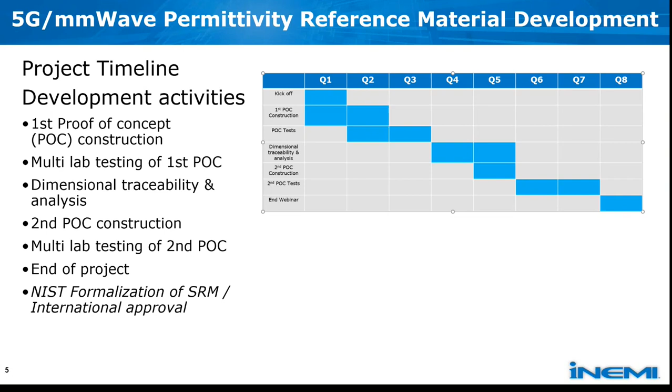Okay. And then the status today is that we have actually performed a fair bit of initial testing for the pre-proof of concept that was done as part of this previous iNEMI project that I'm referring to, the 5G materials characterization project. This was critical to get some early information about how to go ahead and plan for the proof of concept tests.

We also have the confirmation to have the critical resources from NIST who can support this project, because this would be driven by National Institute of Standards and Technology, with Nate being the champion from that team.

We also are going to use fused silica as our primary candidate, and we have been working with the source as well as a methodology of preparing this material with very, very low TTV. We have the partnership with Mosaic Microsystems, who I believe is also on the call, to be able to supply the material and be able to process the material for the rest of the project study.

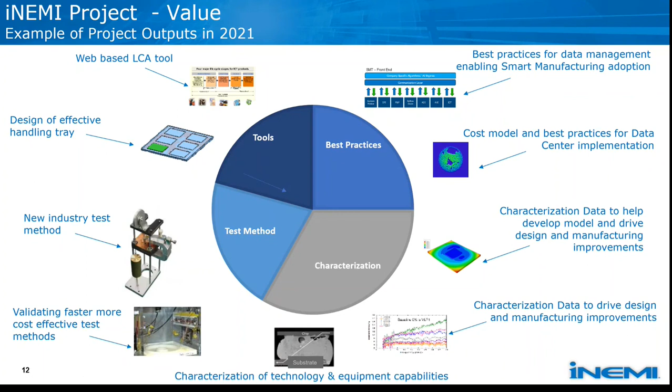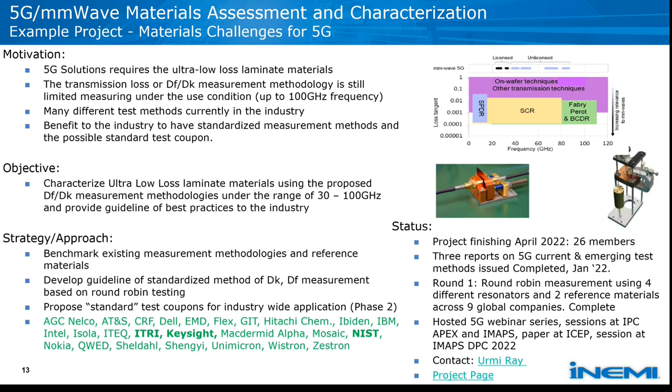We have a lot of projects looking into smart manufacturing, characterization of solder joints, certainly tools for inspection and metrology for packaging, photonics areas, sockets, etc. And then a couple of examples, and you'll get this package of information since you've joined the webinar. So I won't go through this, but this is the 5G mmWave materials assessment project that I talked about.

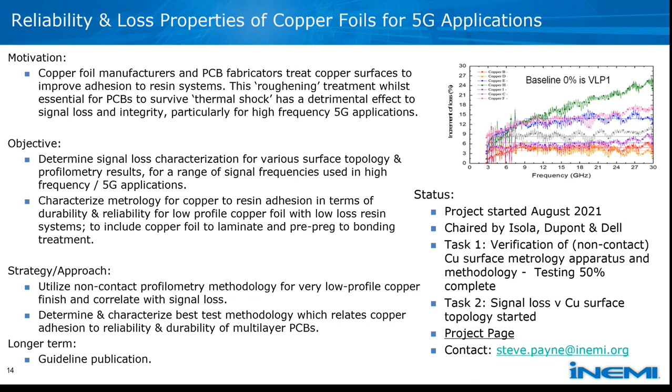There's a similar project, kind of a sister project, looking at the impact of roughness of copper foils for 5G applications that my colleague Steve Payne is leading. Some of you are participating in that project. And then one other example, in a slightly different area, which is on substrates and looking at RDL adhesion strength measurements. I just picked a couple of examples.

In any given year, there are generally of the order of 15 to 20 active projects. Typically, we try to manage these projects in a pretty short time window, 18 to 24 months, so that we have an active group working with a pretty aggressive timeline. And we believe that's the model that is successful and is appreciated by all of the industry members that we have.

By the way, iNEMI also has a lot of, I keep talking about industry, but we obviously work very closely with the national labs and across the globe, and a lot of partnerships with the universities. Okay, so that's the introduction part of the talk. I'm going to hand it over now to the tag teaming team of Nate and Mike. My understanding is that we will go through now the technical details, and I'll hand it off to Nate.

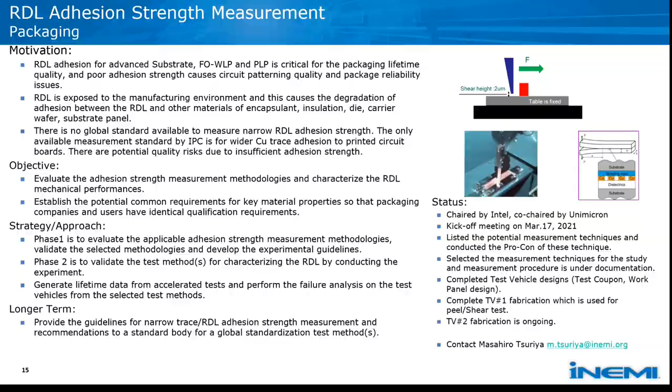Great, thank you guys. Pardon me. Thank you guys so much for coming today, and thank you, Urmi, for the introduction. You guys are all here because you're part of the semiconductor manufacturing complex around the world. You're already familiar with the fact that the semiconductor industry represents a huge part of the global economy. And I think we've listened to you and heard you about what your needs are. Go ahead, next slide.

So in a recent 5G iNEMI report, it pointed out that the lack of traceable reference materials for millimeter waves is a very serious problem. And this lack makes verification of measurement methods and laboratory techniques impossible in an industry setting. Adding to that, an SRC report also identified the needs for new dielectric characterization techniques above 100 gigahertz and up to 500 gigahertz, and the need to characterize inhomogeneous and anisotropic materials for industrial applications. So we know that dielectric properties impact all of microelectronics and manufacturing, and we've heard you about what you need from NIST. So go ahead, next slide.

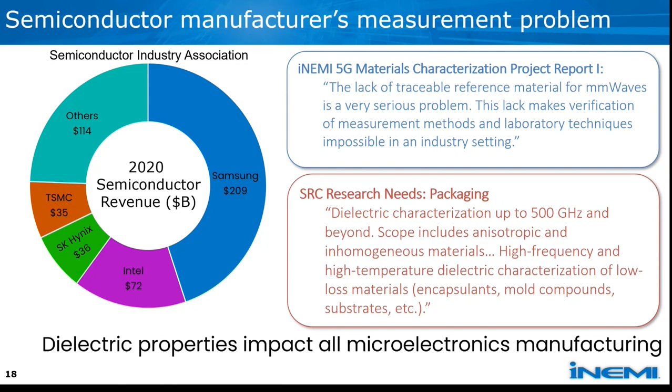So a lot of this was borne out by the fact that some of you went to the NIST Standard Reference Materials website, typed in the word dielectric to order a new standard reference material, and you found that, go ahead, next slide, there is no standard reference material for dielectric constant, regardless of the frequency, whether it's DC or AC or millimeter waves. There's just no standard for dielectric constant and loss tangent, and that impacts your bottom line because it impacts internal metrology characterization and acceptance testing. Go ahead, next slide.

So how do you guys use standards in your everyday labs and materials and device development? Well, one of the ways that you use them is a metrology capability analysis. In this case, you might have 3 technicians, Paul, George, and Joe. They all measure the same thing, and 2 of them get a different answer. In this case, you actually don't know who is right. You might think that obviously Paul and George, because they got the same answer, are doing things correctly and getting the right answer, and Joe is getting the wrong answer. But it could also be that Paul and George are wrong and Joe is right, and there's something fundamental in their metrology or in their calibration, and you wouldn't be able to identify that problem without a standard reference material.

So the second application for standard reference materials is acceptance testing. Go ahead, next slide. So in acceptance testing, you're a vendor or you're a manufacturer, and if you're a vendor, you want to provide the most accurate specification for your material. You want your specification to be NIST traceable so that you know that it's right. And then when you send it to your manufacturer, you want them to implement that permittivity value or loss tangent value that you provided into their models so that when they do internal testing, they also get the same answer, right? So it creates trust between manufacturers and vendors.

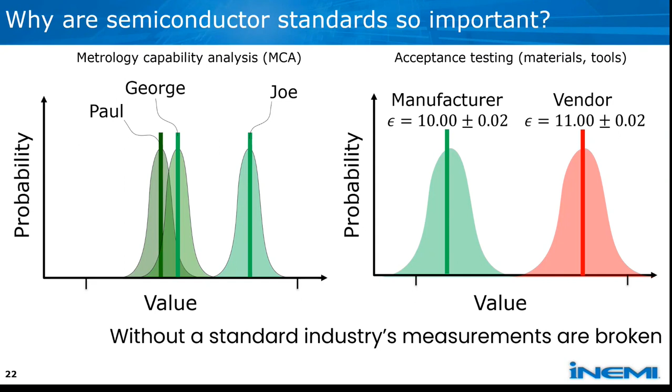If you're a manufacturer and you're receiving a material, you want to know that the materials the vendor is providing and the specifications that they're providing are correct. In this case, we have a manufacturer and a vendor, and the vendor is providing a specification of permittivity 11, but the manufacturer measures a permittivity of 10. Now, this difference is only 10%, and you might not think that that's a really big deal, but as Urmi pointed out, industry really needs uncertainties on the order of 0.2%. And obviously, this is an unacceptably large deviation between the vendor and the manufacturer. So without a standard reference material, industry can't perform these fundamental tasks in order to make new technologies.

Go ahead, next slide. So what can happen without a standard? So when Mike was first telling me about his problems and what he does at Intel, he gave a really good example about the capacitors in the back of a CPU. In this case, what Mike said was that if the permittivity is wrong by about 10%, just like our earlier example, then that might require them to include 4 additional capacitors on the back of their CPU.

Those additional capacitors would cost a total of 34 cents per CPU, but over 100 million units, that would cost Intel about $34 million a year. Now, that's an unacceptably high cost that Intel could avoid, in this hypothetical example, if they had a standard reference material to calibrate their measurements.

Now, this is just a hypothetical, but it illustrates the point that when you have high volume manufacturing, getting the permittivity right is really important. And that's also true for the loss tangent. Go ahead, next slide.

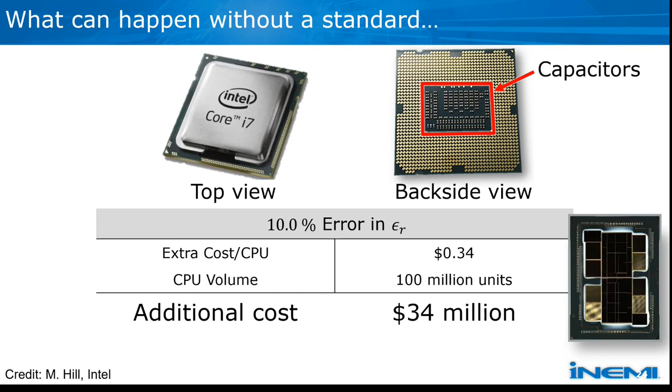You have input-output signals that have signal information in the high gigahertz and the hundreds of gigahertz. You have DC signals and capacitors, and all of those materials need to be characterized in order to get the performance that people want from their devices. Go ahead, next slide.

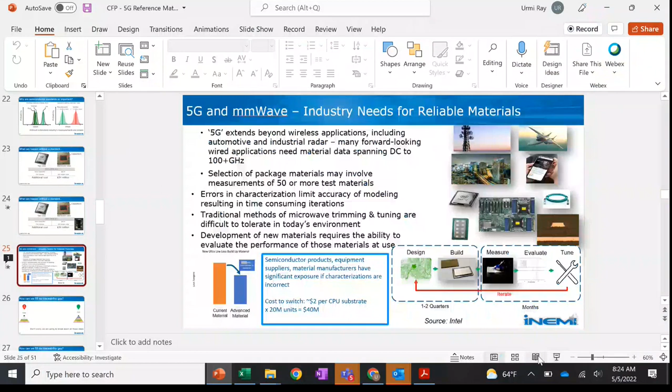So industry needs reliable material properties, and 5G really extends beyond, oops. Yeah, sorry. That's okay.

5G really extends beyond just wireless applications. It really impacts automotive radar and industrial applications that go well beyond what we think of as just telecommunications applications. For instance, you might be surprised to know that automotive radar is one of the leading sectors for companies like Keysight and vector network analyzer manufacturers because they need to characterize the materials that go in automotive radar. So that's really important. Go ahead and chime in.

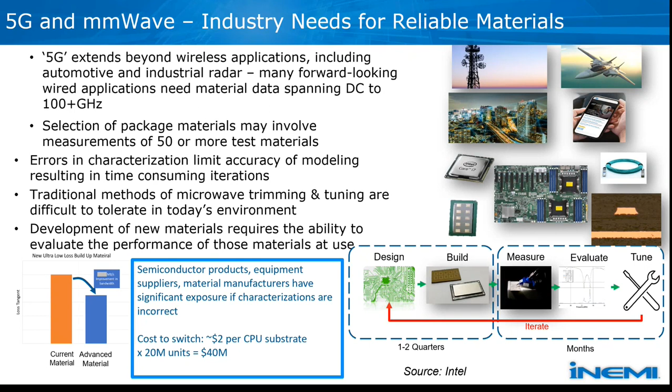That sounds great, Ermi, if you'd like to take this slide. Okay, we'll go ahead and do the next slide.

All right, so how can we fill this? So we've already made the argument for why traceable materials are important, how they impact your bottom line. So you know that you need them, but you don't know what they are. And we also have this fundamental problem of we need to get from the fact that we don't have a standard reference material to a new place where we do have a standard reference material. So how are we going to go from the left to the right? And that's what this iNEMI initiative is going to do. So we have some ideas about what those steps are.

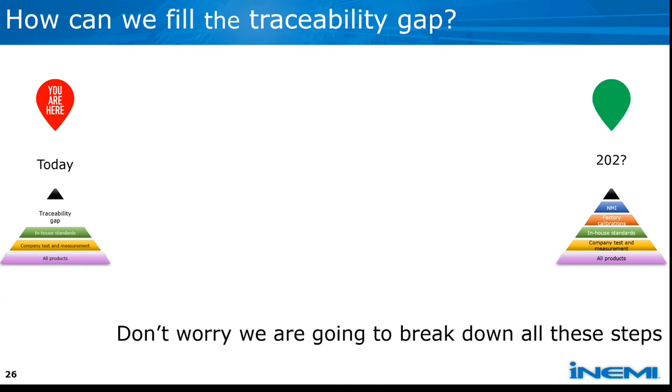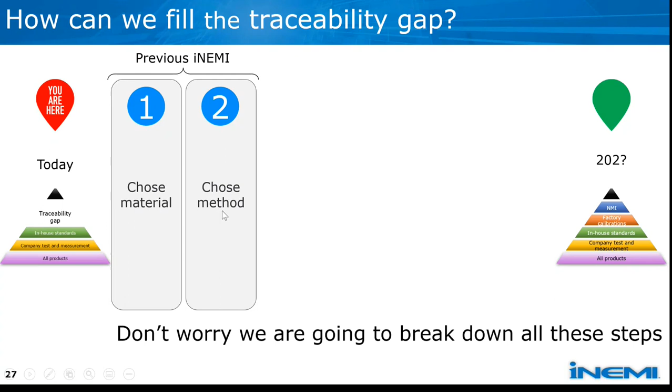So it starts, go ahead, next slide, by defining what the materials and the methods are that we're going to be using to develop a standard reference material. In this case, a previous iNEMI report talked about fused silica, and we're going to discuss that in a minute. It also identified split cylinder resonators as a possible traceability path. We're going to talk about that as well. And go ahead, next slide.

The next step is to develop the fundamental theory that's associated with the standard method that we're going to be using. Then we're going to measure the scattering parameters of our devices with and without the sample. That's going to allow us to extract the material properties once we've extracted the dimensions.

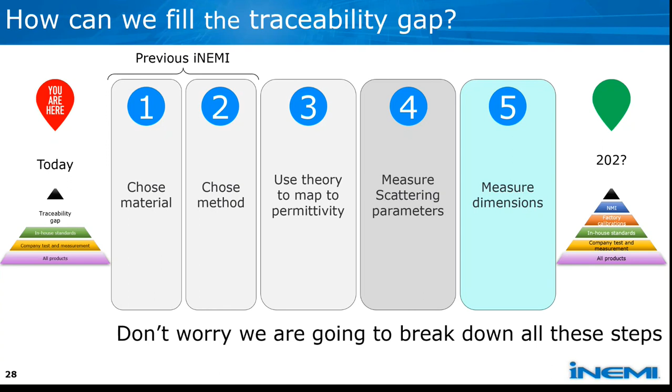So we're going to talk about each of these steps one by one and explain how you, as an iNEMI participant, can play an essential role in defining what the next generation of standard reference material is and what it looks like. Because NIST doesn't want to just make solutions that fill a traceability gap. We want to make solutions that solve problems that matter to you and impact how you would use them. Go ahead, next slide. So let's talk a little bit more about step one.

So here, the iNEMI special report identified fused silica as a candidate for a next generation standard reference material. That's for a few reasons. One, we're able to manufacture it into this geometry, which is this rectangular coupon with the rounded edges. It's easy to manufacture in that geometry. We can also get it to have these very precise thicknesses. In this case, we've got a target thickness of about 150 microns. And we can hit total thickness uncertainties of about 0.5 microns, actually a bit better than that, about 100 nanometers, thanks to Mosaic's new processes.

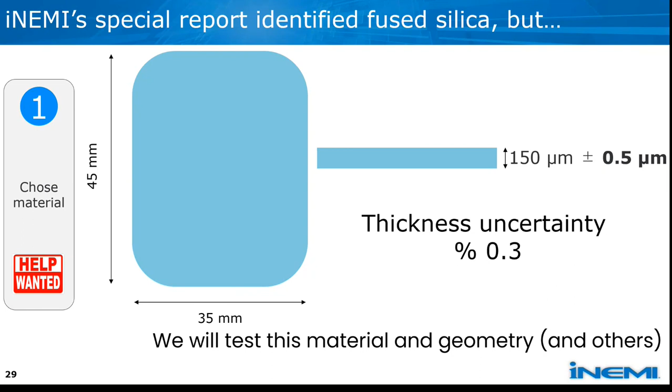That total thickness uncertainty might sound sort of unbelievable. You might think, wow, that seems like a really, really low total thickness variation. Isn't that overkill? And the answer is no. We actually need that level of uncertainty on the total thickness variation in order to hit that specification that Ermi talked about, which was that 0.2% uncertainty on dielectric constant and loss tangent. So in order to deliver that type of uncertainty to you, we need to do much, much better, and that's what's required. Would you like to pipe in, Ermi?

Okay. Okay, so the next step is to choose a method.

What's nice about this technique is that it potentially has a very short traceability path, where the only thing that we need to measure is the diameter of the cavity, the depth of the cavity, and the dimensions of the sample. Go ahead, next slide.

We're going to explore other candidate paths as well as a part of this iNEMI initiative. We want to include whatever path you're doing in your lab as part of the characterization and development of this next generation standard reference material. We want to develop a solution of that little blue coupon. We want to make sure that it works for you. Go ahead, next slide.

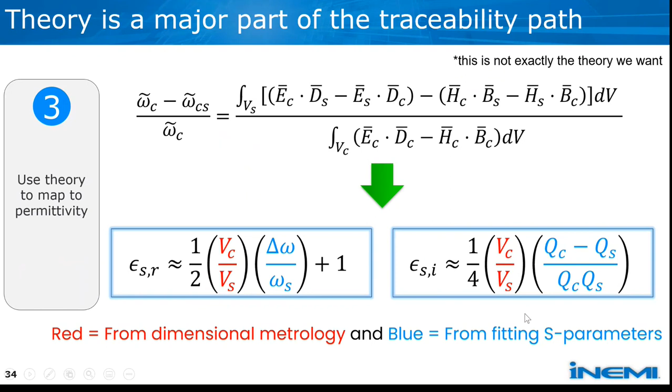And by measuring the transmission, or S parameters, through the cavity, we can find what the resonance frequency is and the quality factor. And we're going to talk about, as when you're a member of the iNEMI initiative, your input will help us test the usability of the candidate SRMs in your manufacturing test measurement setups. Go ahead, next slide.

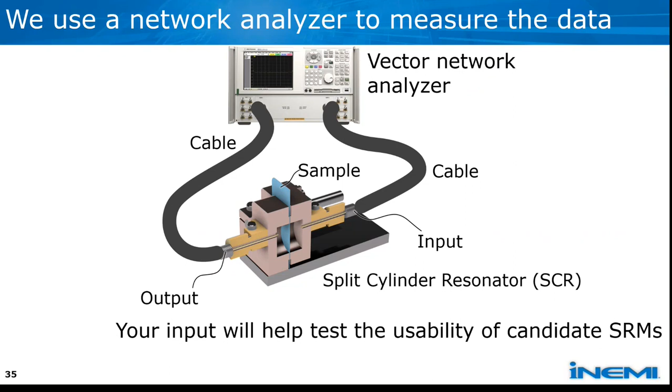And all we're going to do is we're going to measure that resonance frequency, that fc and Qc. And sometimes we'll write omega c. That's just 2 pi times fc. That's the angular frequency right there. So we're just going to measure the cavity with and without the sample. Go ahead, next slide. So let's take a zoom out here.

We're going to zoom out and we're going to look at the cavity. You can see that it's a very, very sharp peak without the sample. Go ahead, next slide. Once you introduce the sample, the peak moves to the left and down. That's because you're kind of like loading the capacitance in the cavity, and it's kind of like an LC circuit. So as you increase the capacitance, that's inversely proportional to the resonance frequency, and so it shifts down. So we measure how much it shifts down.

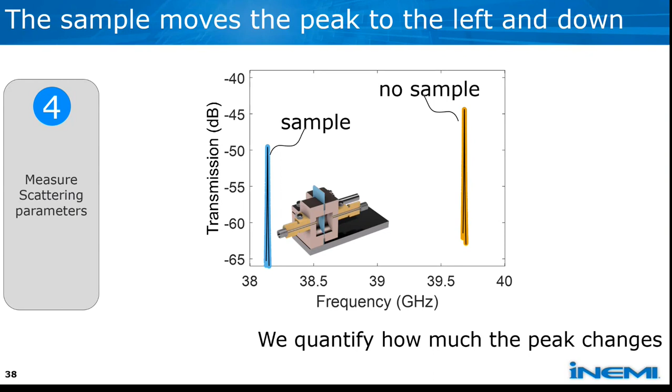Go ahead, next slide. So we measure how much it goes down and how much the quality factor changes. So here you can see that our resonance frequency is shifting by about 1.5 gigahertz, and the quality factor is changing by about 2,500. So these are essential inputs that go into the theory and allow us to extract the material properties. Go ahead, next slide.

So the next thing that we need to do is we need to measure the thickness of the sample. That's one of the most critical properties of the little blue coupon, right? And we think that this white light interferometry technique that's being sold by FormFactor is the best way to measure the thickness of that coupon for our technical applications. And in this case, we really need uncertainties on the order of like 100 nanometers, and you'll see why.

So there are a lot of requirements to this technique. We're still learning about it. And what this technique would allow us to do, as your participation in the iNEMI activity, is you would be able to compare our measurements of the thickness of the sample, which is calibrated with NIST standard reference gauge blocks, to whatever measurement technique that you're using. So you can also view this standard reference material as also a thickness standard for measuring glass, which is kind of interesting. Go ahead, next slide.

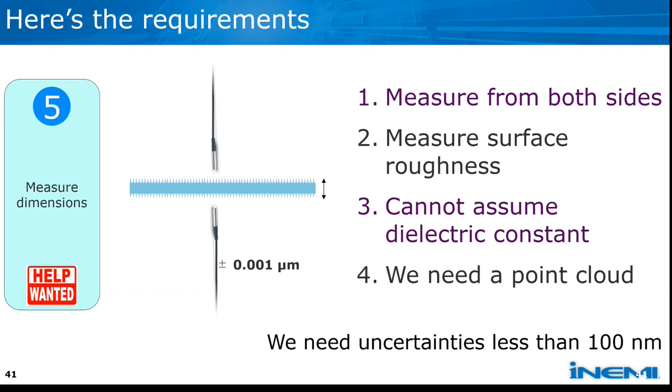So the final part to getting traceability is the dimensional traceability of the cavities. So this is a really big piece, and I'm really happy and proud of my management for really coming to bat and getting NIST Gaithersburg to help us get these measurements. As you might imagine, dimensional traceability is one of the most highly sought after and demanding things that NIST does, right?

The people that provide dimensional traceability are working all the time to provide dimensional traceability for everything that you can possibly imagine. And so NIST Gaithersburg has agreed to dimension our split cylinder cavities as a top priority for the next fiscal year. And we're going to talk about what those dimensions mean.

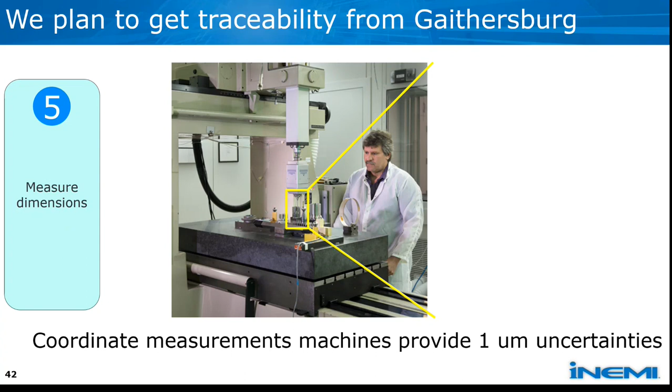Go ahead, next slide. So the way that they do these dimensions is with a very special coordinate measurement machine. And this might look very different than any coordinate measurement machine that you might have seen before. This is a very special one that NIST had made for this exact purpose. And it's capable of providing uncertainties down to 1 micrometer at multiple points along this cavity.

So we're going to get the dimensions of this cavity, we're going to get the diameter and the depth of the cavity, and those measurements and their associated uncertainties factor large in the total uncertainty on the permittivity and the loss tangent that we will provide to you.

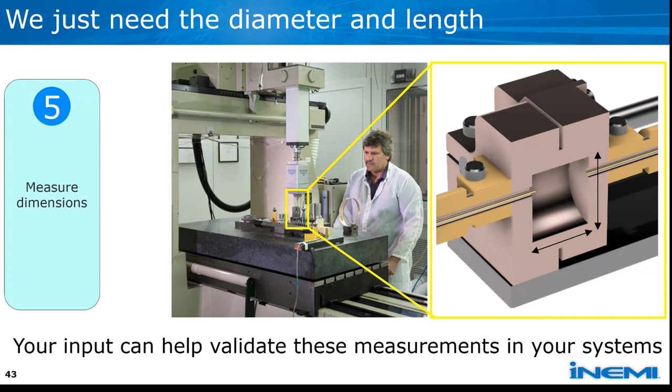Go ahead, next slide. Okay, so now we've talked about this pathway, and I told you all the steps in the pathway, and we also have prototypes that we've begun to do testing at NIST and characterization techniques, and so we're well on our way to providing traceability, maybe within the next couple of years, right? Maybe within the next year even.

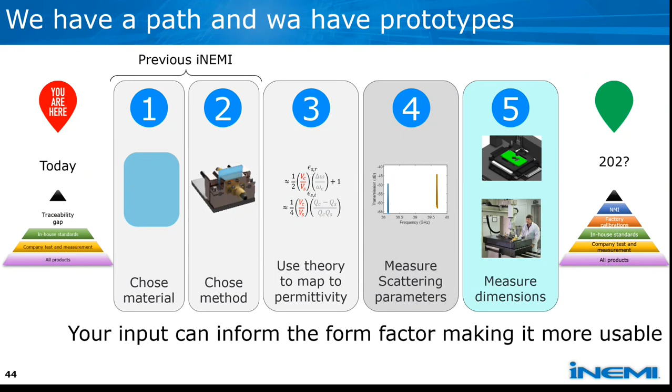And at the end of the day, you really want to know how those different inputs factor into the total uncertainty that NIST can provide to you. Let's go ahead and go next slide. So at the end of the day, we really want to know that NIST's solution is a solution that impacts you and your needs as industry.

And there are a couple different things that you need to keep in mind, right? You need a total uncertainty of about 0.2%. Well, there's something called the gauge maker's rule, and the gauge maker's rule means that the gauge that you use to make your measurement needs to be many factors smaller than your total uncertainty on your gauge.

Does that make sense? So if you're providing a specification that is a 0.2% uncertainty, NIST needs to provide you a standard that has many times smaller total uncertainties, typically about a factor of 10. So NIST's goal uncertainties should be about 0.02% on the total uncertainty on the permittivity that we provide to you.

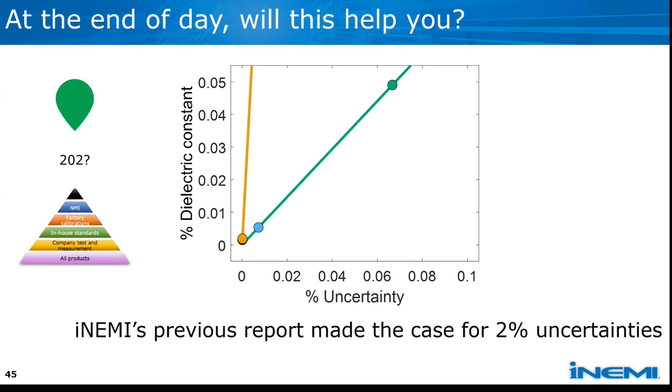Now, depending on the applications, you might be able to tolerate a gauge maker's rule of about a factor of 4, and that's what this plot is here. Let's go ahead and do the next slide. So the key things to understand this slide are that the y-axis is the total percent uncertainty in the dielectric constant on the SRM that we're providing to you, right?

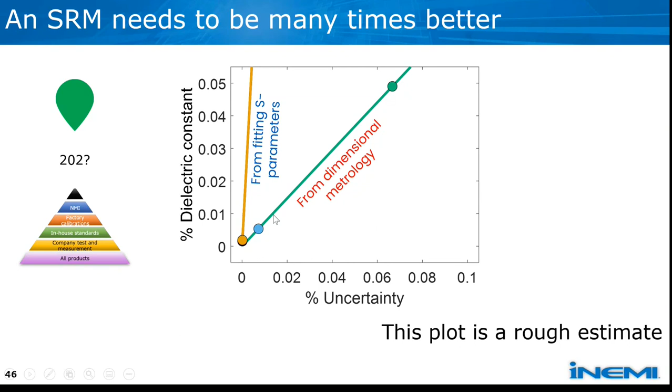And the orange line here is the uncertainties from fitting the S parameters. That's how accurately we know the Q or how accurately we know the resonance frequency. The green line is the uncertainties due to the dimensional metrology. And so the bright green line, go ahead, next slide.

The green dot is the total thickness uncertainty in the wafer that we would be getting from Mosaic for the fused silica SRM, and the blue dot is the uncertainties assuming a 1 micron dimensional uncertainty on the cavity. So you can see how these different numbers factor into the total uncertainty that NIST can provide to you. I'm not really worried about the S parameter fitting right now.

The contribution of the uncertainties on the S parameters are so small that they almost don't matter at this point. Like, NIST has crushed that. S parameters, no problem for NIST. But dimensional metrology, that still looms large.

So what I don't want you to think is that this is exactly the plot at the end of the day. I've made a lot of approximations to make this plot for you, but it provides some idea about how the total thickness uncertainty in the sample and the uncertainty in the cavities play into the uncertainty of the dielectric constant that NIST will provide.

And at the end of the day, your input will tell us how low NIST needs to go on the y-axis. And at what frequency, right? Okay, let's go ahead, next slide.

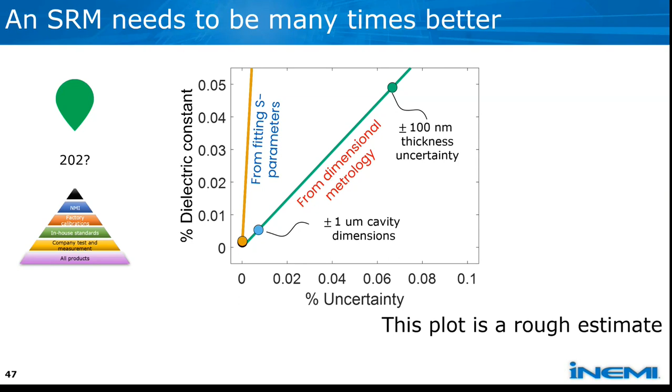So what I've told you so far is absolutely true. NIST is going to develop a materials characterization coupon that you can stick hopefully in your cavities or whatever technique you're using to measure the permittivity.

NIST is also developing on-wafer calibration kits that may go along with those coupons, so that when you apply your calibrations to your integrated circuits or whatever your applications are, your antennas, you can also do NIST traceable on-wafer calibrations, which would be a first ever thing that NIST would provide.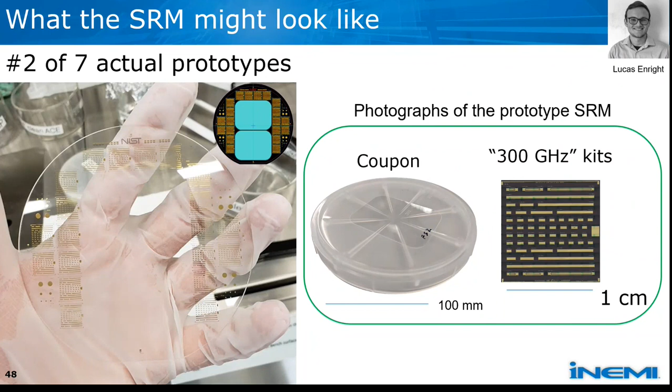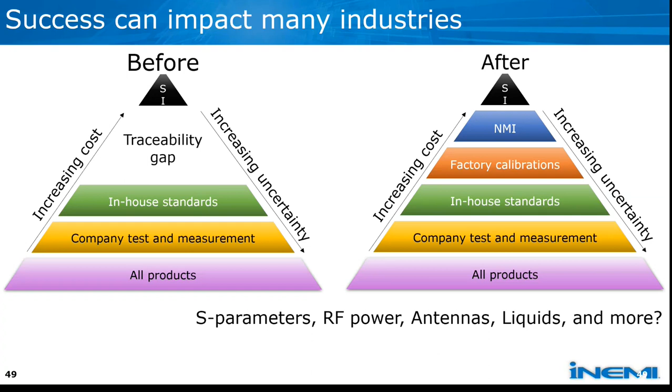Okay, so here's my dream, right? My dream, or Urmi's dream, or Mike's dream, for that matter, is that Mike goes to the NIST website, types in dielectric, and there's SRM42, because it's the answer to everything. And you have an ultra high purity fused silica dielectric constant and loss tangent from 1 gigahertz to 1 terahertz. And that's your traceable standard reference material right there. Okay, go ahead, next slide.

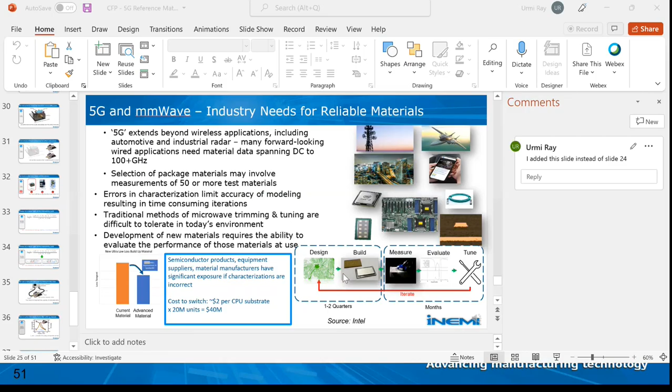Okay, so with that, I'd like to open the floor for questions. Hopefully I'm not too over time, and I'd love to answer your questions and get your feedback on things that we need to consider when we're doing this, and whether or not you're interested in it.

Yes, thank you very much, Nate. Really, really nice presentation. And Mike, I don't know if you had anything to add. In the meantime, I'm going to go to the chat window and ask for people to put in their comments in there for any of the questions for Nate and Mike, as well as myself, in terms of either the technology part of it, the timeline, any other questions. So, Mike, do you want to add anything to the presentation or to the overall talk today?

Not really. I think Nate did a really good job of covering the project. There's a couple of questions that came up in the chat. I've been trying to answer them, at least from my perspective. There's one that I'd like to have you comment a little bit on, Urmi, with respect to the funding of the iNEMI projects. There was a question related to how they're generally funded, and my explanation was that, at least in the ones that I've been involved in, it's sort of a volunteer basis for the iNEMI participants. But I wasn't sure if there are other funding methods that have existed for different iNEMI projects. Maybe you'd like to comment on that.